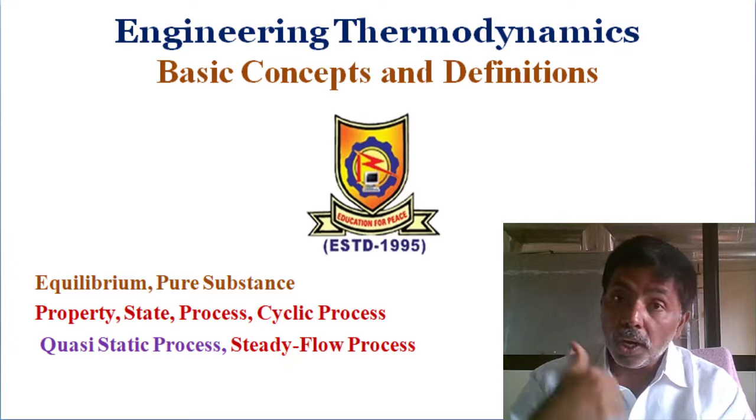Today we will discuss further vocabulary like equilibrium, property, state, process, cycle, quasi-static process, and steady flow and uniform flow. First of all, equilibrium from the thermodynamic point of view.

Equilibrium does not mean a system reaching only a common temperature. That is called thermal equilibrium, not thermodynamic. If the system contains different pressures, then after some time it will reach a common pressure. Then it is called mechanical equilibrium.

Our system contains different components, different phases of the components, which have different chemical potentials. Steam has a different chemical potential, water has a different one, and ice has a different one. After some time of mixing, it will reach a common phase, so a common chemical potential. So equilibrium means it must be thermal equilibrium, temperature, mechanical equilibrium, pressure, and chemical equilibrium.

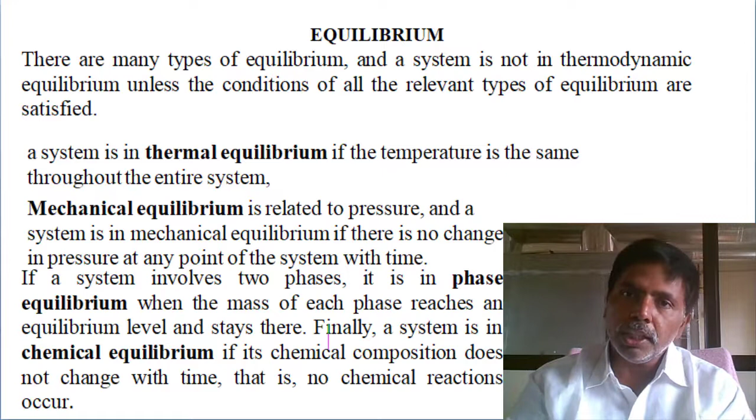The combination of these three equilibriums is called thermodynamic equilibrium. If any system is not reaching chemical equilibrium, then it is not a thermodynamic equilibrium. If the system is not reaching mechanical equilibrium, then it is not a thermodynamic equilibrium. Only if we fulfill all three is it called thermodynamic equilibrium.

But if the system has different pressures, after some time it will automatically reach mechanical equilibrium. If the system has different temperatures, say we place a hot rod, after some time it will reach the normal temperature. So for attaining the equilibrium condition, you don't need to spend any energy. For disturbing the equilibrium, you need to spend some energy. Attaining equilibrium is a common practice of nature, but to disturb the equilibrium, we spend some energy.

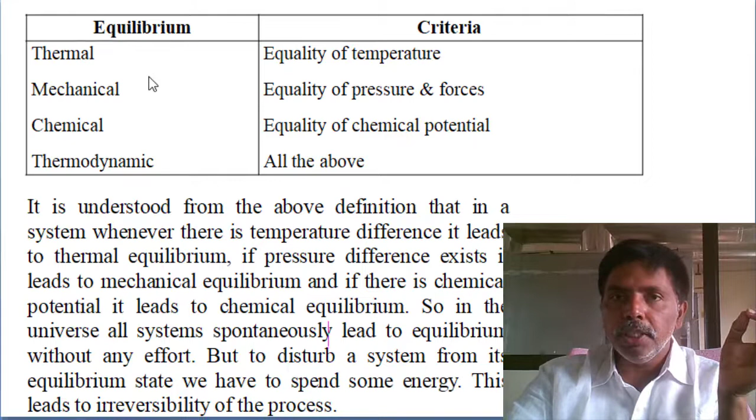But from the thermodynamic point of view, equilibrium means it must be thermal equilibrium, mechanical equilibrium, and chemical equilibrium. The next word we are using is pure substance. The simple definition: if in all phases the chemical composition is not changing, then it's called a pure substance.

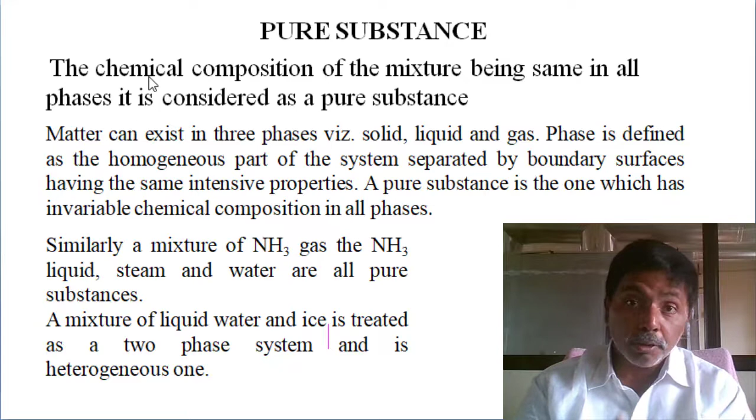In the universe, the God-gifted pure substance is water. Ice has the chemical composition H2O, water also H2O, and even steam is H2O. In all phases the chemical composition is not changing, so it's called a pure substance. We will study pure substances in the fifth unit, about steam.

Next, move to property. What is a property? It is a measurable characteristic which describes the condition of the system. So a property must be a measurable characteristic. Properties may be intensive or extensive. Intensive means independent of mass. Extensive means dependent on mass.

But how do I determine whether a property is independent of mass or dependent, intensive or extensive? Whatever system I select, I will divide the system into unequal parts. Then you measure the property. If the property gives the same value, it is independent of size, and it is called an intensive property, independent of mass.

Pressure, temperature, viscosity are intensive properties. Extensive means it depends upon mass. All types of energies you consider extensive properties: mass into Cp into delta T. But specific extensive properties, like specific volume in meter cube per kg, are intensive properties.

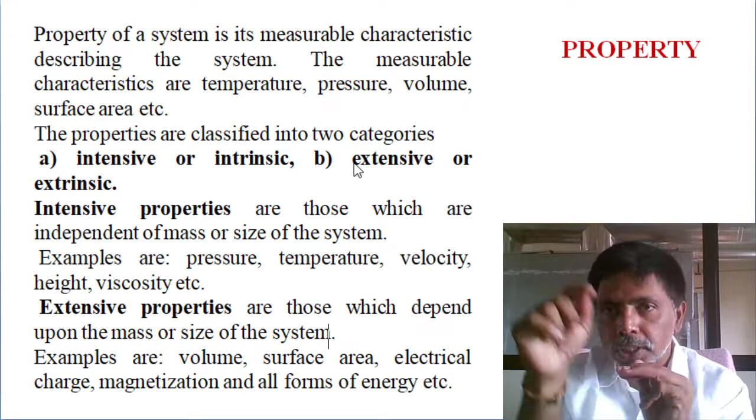For all specific extensive properties, extensive property divided by mass gives an intensive property. In steam tables, you can see pressure-based and temperature-based steam tables, with specific volume, specific enthalpy, specific entropy. Generally, enthalpy, volume, and entropy are extensive properties, not intensive. But we want intensive properties, so we divide by mass: extensive property divided by mass gives the intensive property.

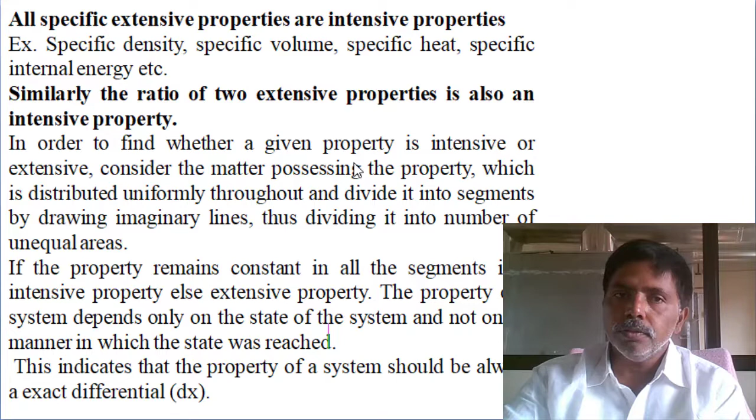Next, state. Once we know the definition of property, what is state? The unique condition of the system at any instant of time. Time is important; you will not get a lifelong unique condition. Every time the unique condition is changing. The state changes from state 1 to state 2, state 2 to state 3. From initial to final we are moving.

So at a particular time, the unique condition of the system you are describing by the measurable characteristics, properties only. The intensive independent properties only. So state means unique condition. How I am describing? Suppose one common equation we are writing for a competition exam, it is useful.

How many independent intensive properties are required for describing the unique condition of the system at a particular time? F equal to number of components minus number of phases plus 2. Suppose single component I selected, single phase I selected, then 1 minus 1 cancels, means 2. Finally, we will get 2. So, minimum 2 intensive independent properties are required for describing the condition of the system.

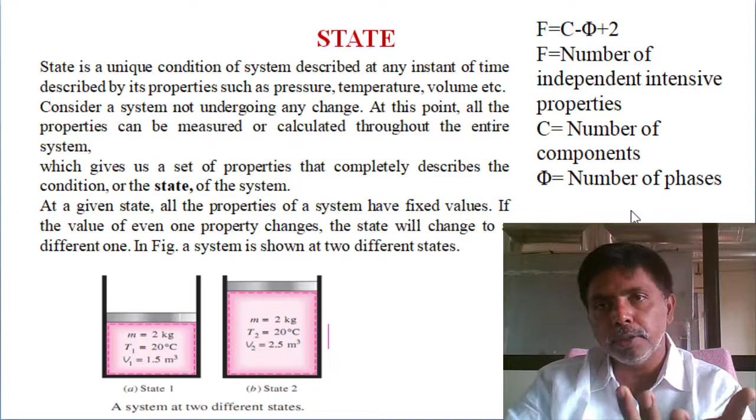In steam tables, you can see pressure and temperature, the best independent intensive properties. You can measure. It does not depend on both. It is unique. So minimum 2 intensive independent properties are required for describing the unique condition of system at a particular time. This equation may be useful when they give different components, different phases. At that time you substitute and you will get the minimum number. But in general condition, the minimum number is 2.

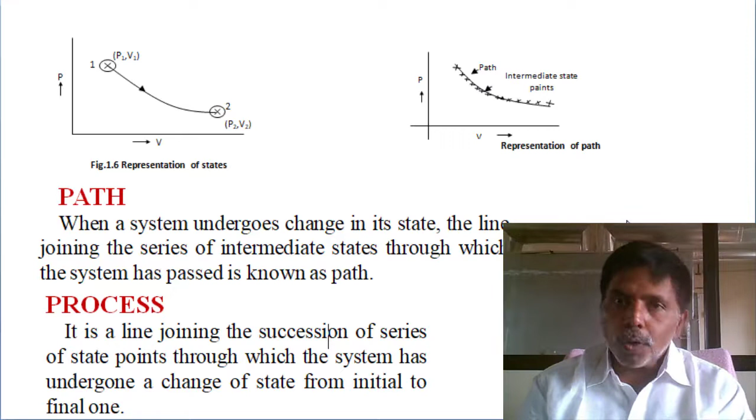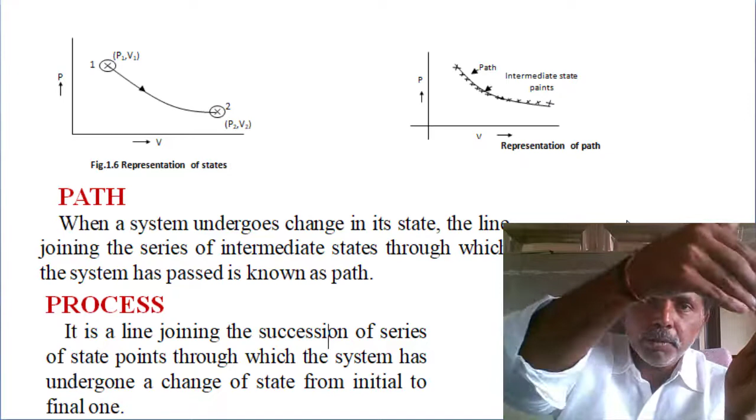Next, what is path? System is moving from one state to another state. The line joining successive state points is called path. That's all. One path it is moving. Then what is process? From initial to final, whatever the path you connected. Initial state to final state, in between successive state changes will take place. That entire path line joining from initial to final is called process.

The difference between state change and process. In the state change, infinite number of paths are available. But in process, only one fixed path is there, that is called process. In both conditions, change of state or process, the system is moving from initial to final. But if infinite number of paths are there, it is called state change. Only unique path is there, it is called process. In GATE concept-based multiple choice questions they can ask this question: the major difference between change of state and process.

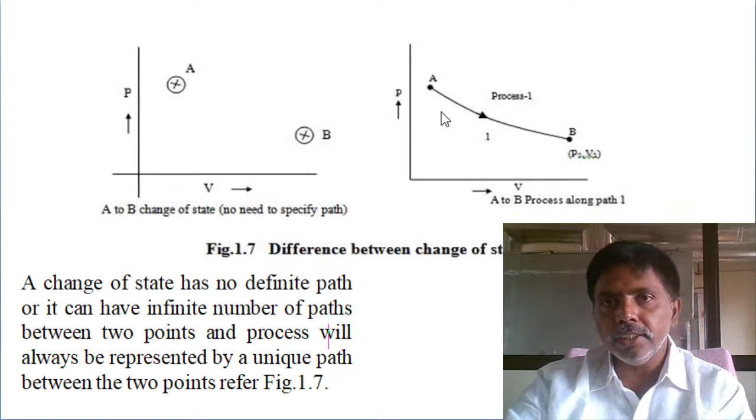Next, what is cycle? Cycle generally is a combination of processes. But what is the condition? The initial state equal to final state. How many processes are required for a cycle? You see, I started from initial state A and by path 1, I move to B. Again, I want to move to A. One cyclic process. Initial state equal to final state. So cycle means combination of processes, but only one condition: initial state equal to final state.

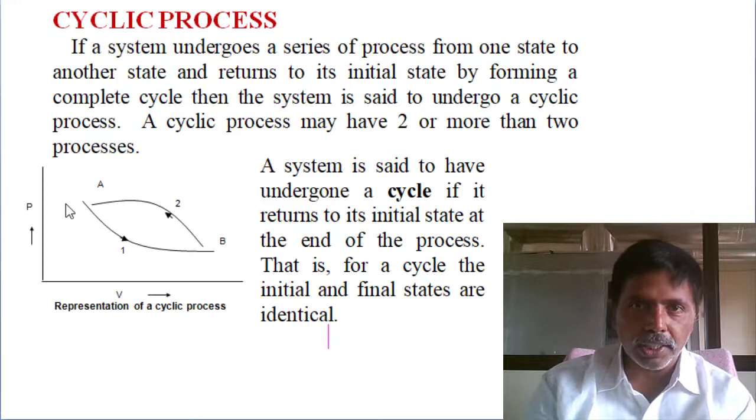Generally in cycles, whatever cycles you are using, power generation cycles, refrigeration cycles, minimum we are maintaining four processes: two work interactions, two heat interactions. Dual cycle contains five processes. But only one condition: initial equal to final. So cycle also is clear. Now, once property is clear, state is clear, process is clear, cycle is clear, then what is quasi-static process?

Generally in the universe, all processes are irreversible processes. There is no reversibility. But while we are deriving the equations, while we are calculating, we are assuming all processes are reversible. Our first assumption: all processes are reversible. But how will we achieve reversibility? That is the first question mark. At least one elucidation is required. That elucidation is the quasi-static process. Quasi means almost. Static means no motion.

It's called quasi-static process. For example, you can select a piston and cylinder arrangement. Cylinder is filled with gas. We place the piston. Now, how much gas pressure is there? According to that, we place the weight, means on the piston a load will be connected.

Now, if I remove the piston weight, the piston will directly reach the stopper, state 1 to state 2. Is it then a reversible process? Applying the same energy, the system will not move back to reach the same state; some more energy we would have to apply. That is not reversible. Instead of that, what I am doing now is removing a small dW, a small

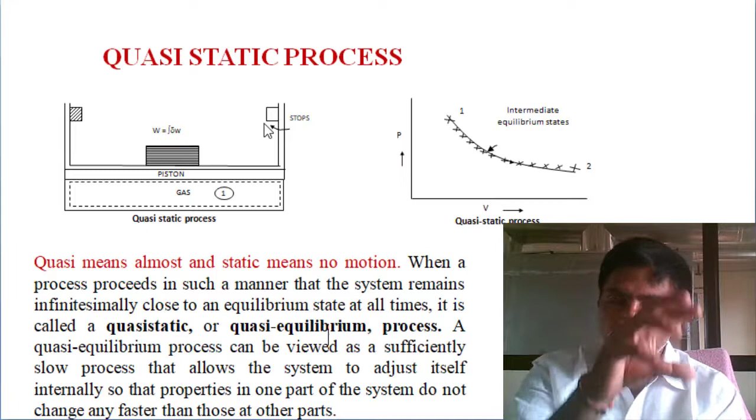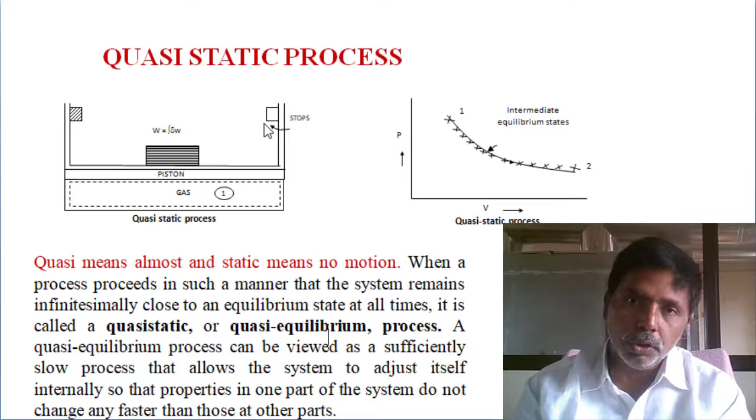So 100 is not possible. Some benchmark, say 70%, is possible at particular working conditions. 70 is our benchmark, so it is easy to give targets to the engineers. So with these two advantages, we are assuming in entire thermodynamics that all processes are reversible. We achieve reversibility by quasi-static process only.

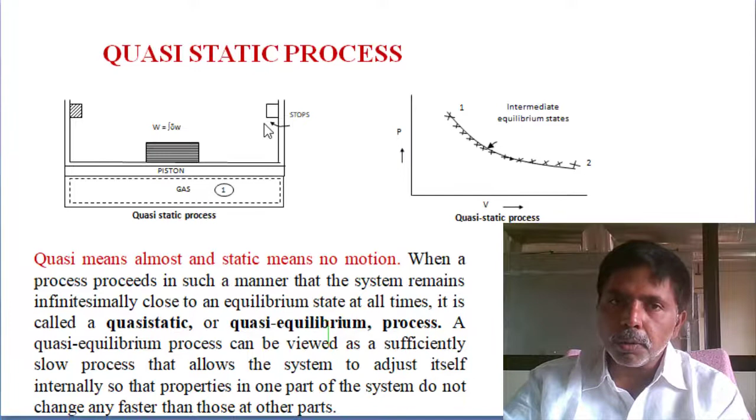It's called steady flow. The term steady implies no change with time. The system contains different temperatures, not a unique temperature, but the temperatures are not changing with respect to time. It's called steady. In entire thermodynamics we are dealing with steady, not uniform.

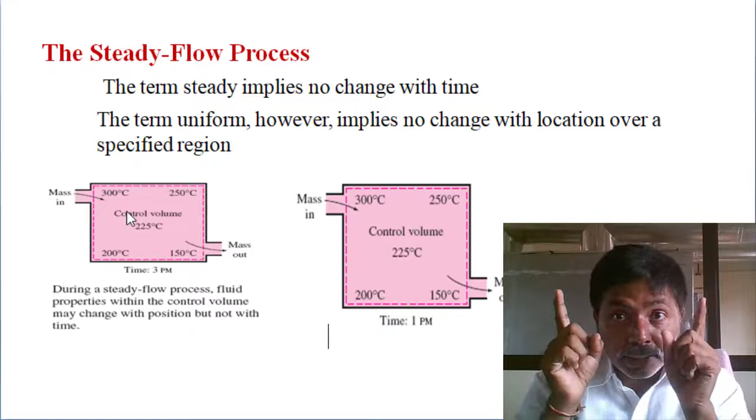You see, in refrigeration, the condenser is always heat rejection, the evaporator always heat absorption. So the evaporator temperature is always around -5 degrees Celsius. The condenser is always above ambient. It is fixed. After 10 years or 100 years of running the refrigerator, it has different temperatures, but those temperatures are not changing with time. So in entire thermodynamics we are dealing with steady flow.

Uniform means a particular location or region having a common property; then it is called uniform. In children's schools we say all are wearing one uniform at a particular time. With respect to time, it may change. But thermodynamics deals with steady flow only. Steady flow and quasi-static process, these two are common for thermodynamics.